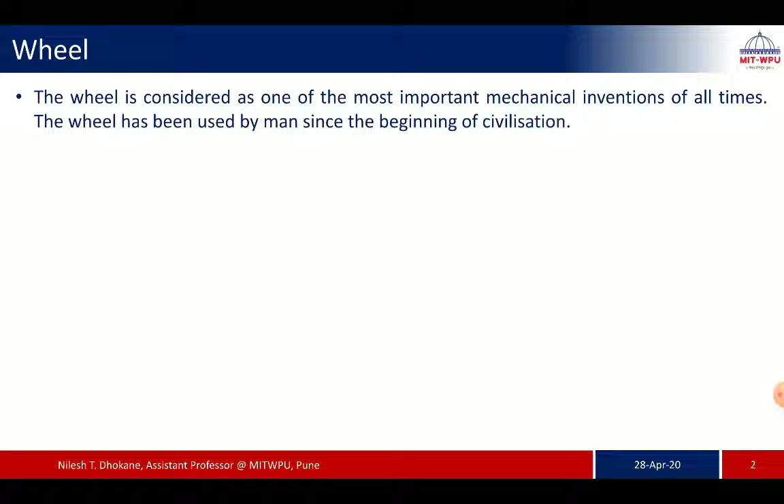The most important mechanical invention of all time is the wheel. The wheel has been used by man since the beginning of civilization. Most primitive technologies since the invention of the wheel have been based on its principles. The invention of the wheel perhaps happened in the late Neolithic age, and it is likely that along with other technological advancements, it gave rise to the early Bronze Age.

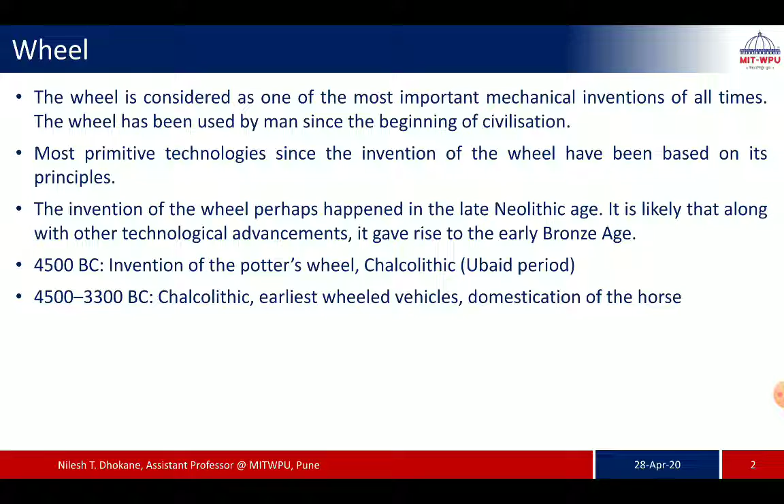So here we will see, in 4500 BC there is the invention of the potter's wheel, and then how it got evolved from 4500 BC to 3300 BC to the Chalcolithic era, earliest wheeled vehicles, domestication of the horse, then early Bronze Age, Middle Bronze Age, and finally the spoke wheels.

Now we'll not go into more detail about the wheel, but this is an important part of the automobile. That's why I have explained when the invention of the wheel was done and what is the part of this invention in human civilization.

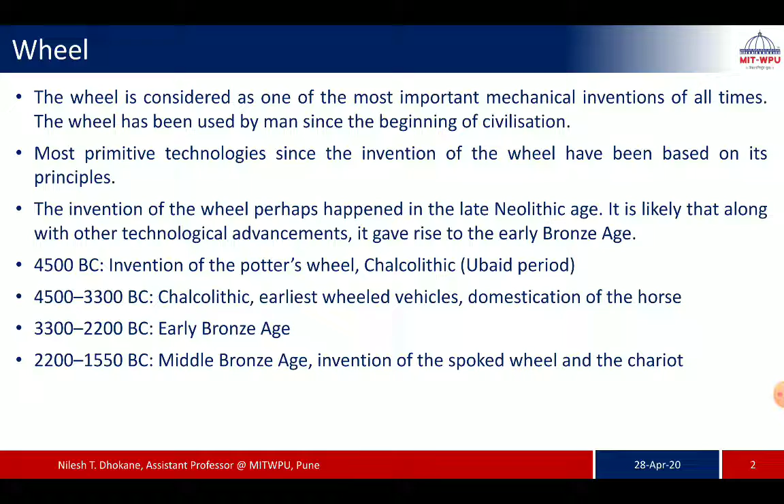Mostly the eras are classified like this, or one more classification I will show you in the next picture. For automobiles, there is the veteran era from 1880s to 1903, then the Edwardian era from 1903 to 1915, then vintage cars from 1919 to 1930, then before World War II there is one segment of automobiles. After World War II there is an impact on the field of automobiles, and finally the modern era, which is still continuing, and we are right now in the modern era.

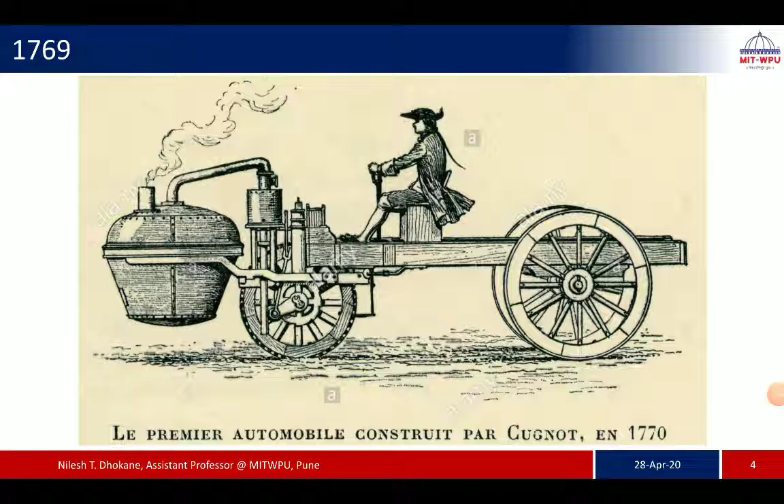Along with this we have some other classifications also, but before this we'll see this first automobile, which was invented in 1769 by Nicolas-Joseph Cugnot, and this is how it looked like. So we'll see about this.

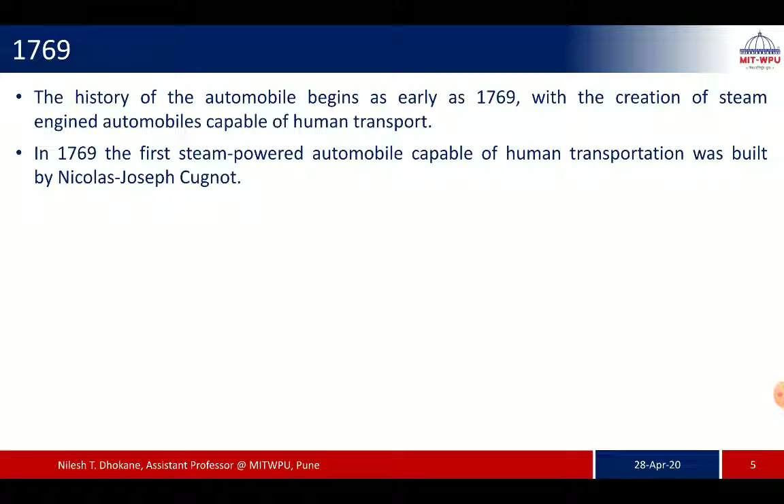The history of the automobile begins as early as 1769 with the creation of a steam engine automobile capable of human transport. In 1769, the first steam powered automobile capable of human transportation was built by Nicolas-Joseph Cugnot.

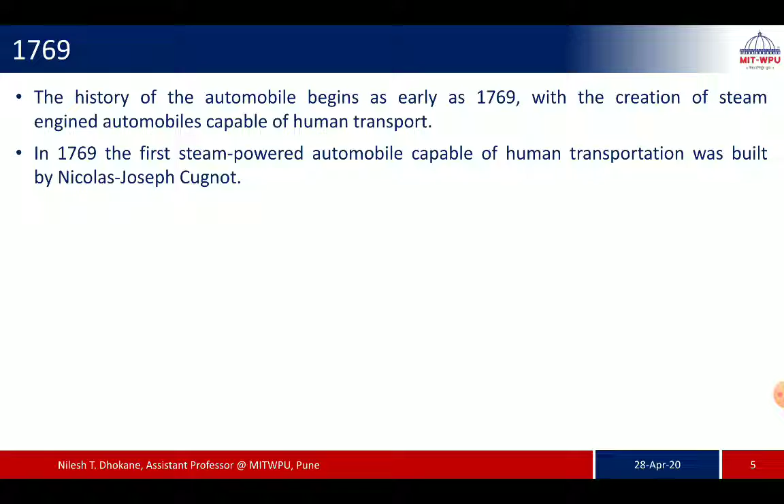After this, we can classify seven eras in chronological order. The first one is the invention era. After Cugnot, the invention era begins, in which there is the invention of the Benz car in 1885. The next is the innovation era after 1896, in which the automobile changed radically from those in previous years.

From 1908, there is a manufacturing era, and after this, around 1920, there is a capsule era where closed cars are manufactured. Before this, the cars were open. We'll see one by one all these eras and what are the different automobile models in all these different eras.

Classic era from 1930 to 1940, before World War II. Then after World War II, there is the integration era, and finally the modern era in which we are living, which starts around 1965 or 68, we can say. And we'll see what different car or automobile models we can see in the modern era nowadays.

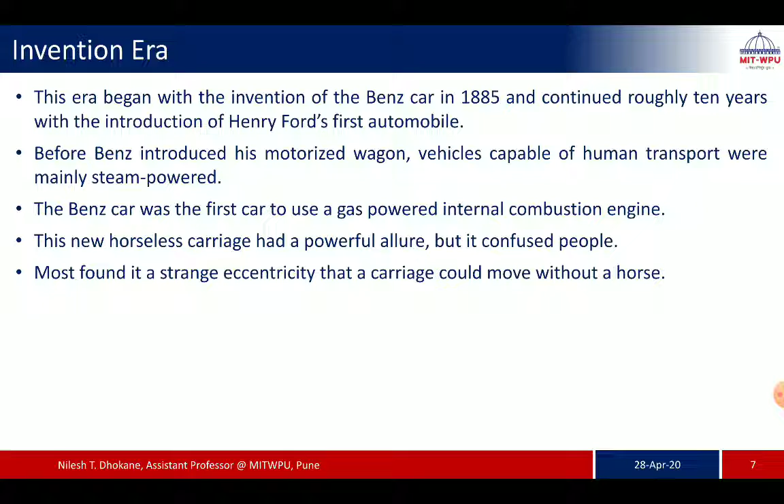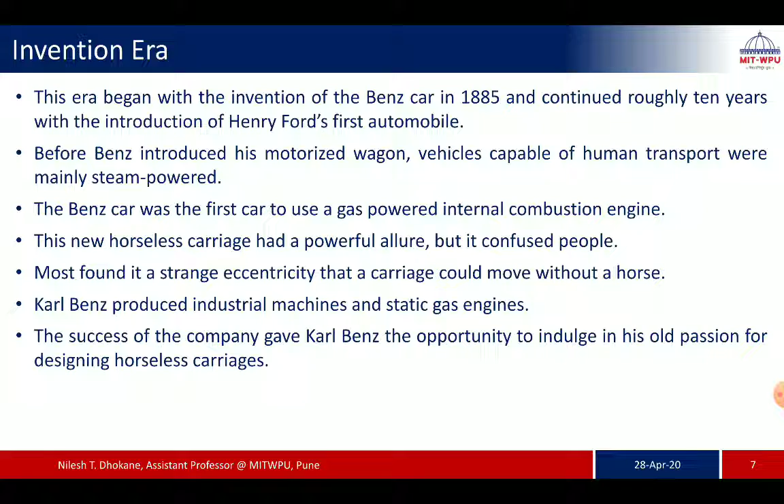Karl Benz produced industrial machines and static gas engines. The success of the company gave Karl Benz the opportunity to indulge in his old passion for designing horseless carriages.

In the invention era, Benz wanted to create an automobile that would run entirely on its own power. This would not simply be another motorized horse carriage using the same technology as his beloved bicycle. He introduced the Benz Patent Motor Wagon in 1885.

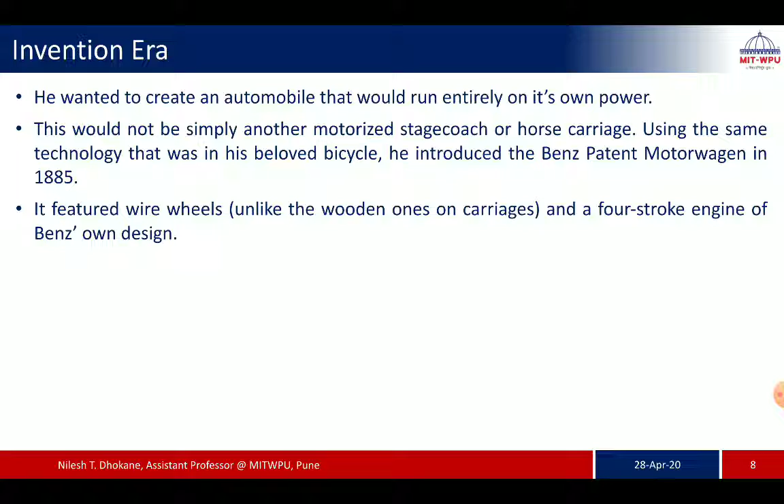It featured wire wheels, unlike the wooden ones on carriages, and a four-stroke engine of Benz's own design. It incorporated an advanced coil ignition and evaporative cooling system rather than a radiator. Power was transmitted by means of two roller chains to the rear axle.

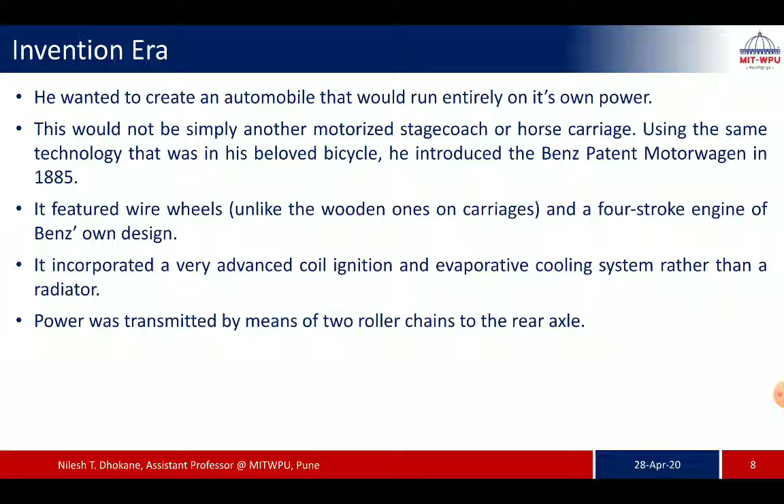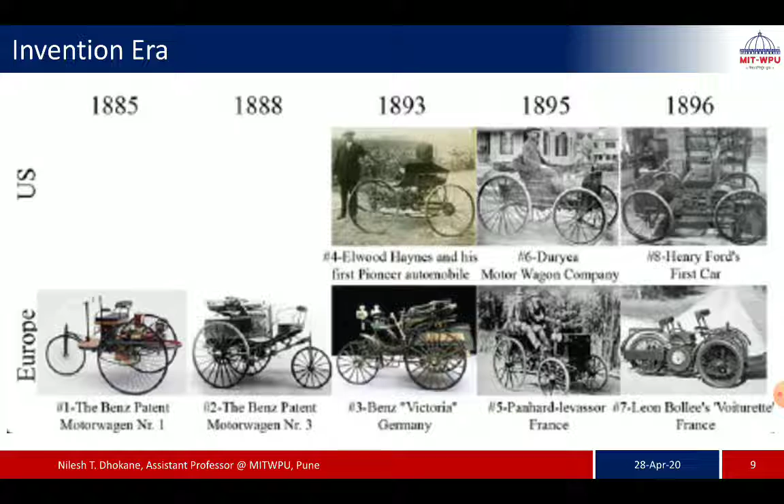Here you can see how the invention era has different car models starting from 1885. The Benz was the first one in 1885. Then some other models followed: 1888, 1893, 1895, and 1896. These were the automobile models of the invention era.

After the invention era came the innovation era, after 1896, where automobiles changed radically from previous years. Throughout the innovation era, widespread car use was still uncommon, and the automobile was seen more as a novelty than a genuinely useful device. The horse and carriage remained the reliable method of transportation, but automobiles sparked people's imaginations.

Automobile designers knew that carriages, which had a relationship to the horse, were not appropriate for their new automobiles. The new cars reflected other changes in society. New industrialists were quickly replacing old familiar ways with a fast-paced lifestyle. As the automobile evolved in the innovation era, it epitomized speed and freedom.

Henry Ford was the first to bring his innovative designs to the new world in the innovation era. Ford's automobiles were different from other cars of that day. His new mass production methods and quality materials set his cars apart, though the price of Ford's car was lower than other vehicles.

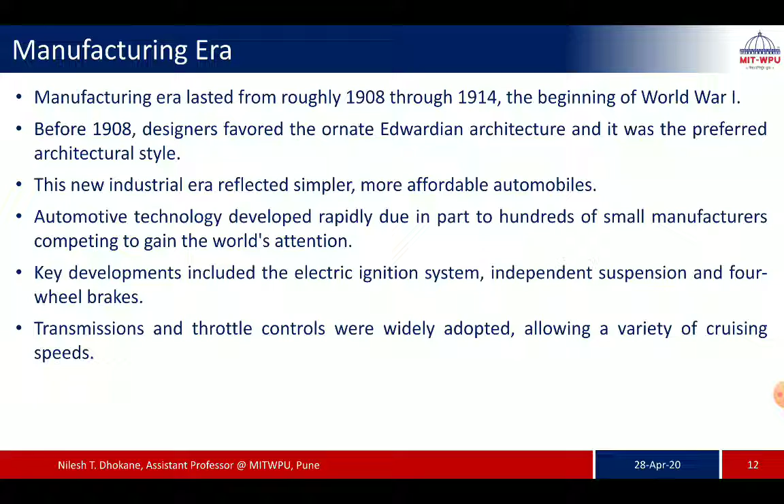Automotive technology developed rapidly, in part due to hundreds of small manufacturers competing to gain the world's attention. Key developments included the electric ignition system, independent suspension, and four-wheel brakes. In the manufacturing era, transmissions and throttle controls were widely adopted, allowing a variety of cruising speeds.

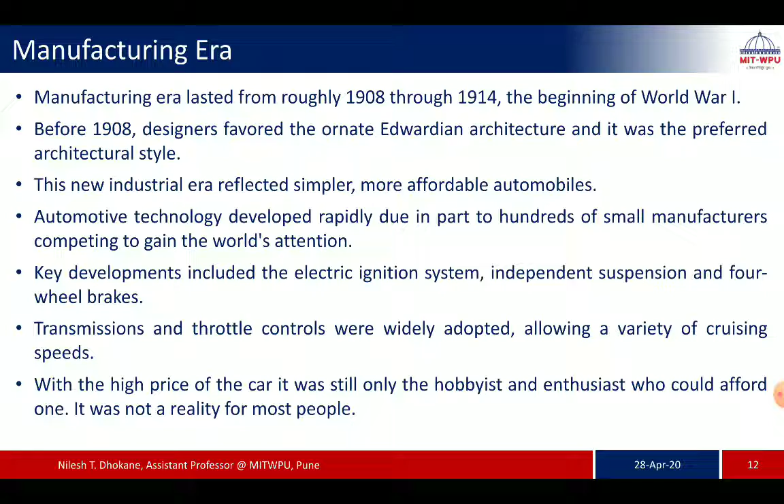With the high price of the car, it was still only hobbyists and enthusiasts who could afford one. It was not a reality for most people.

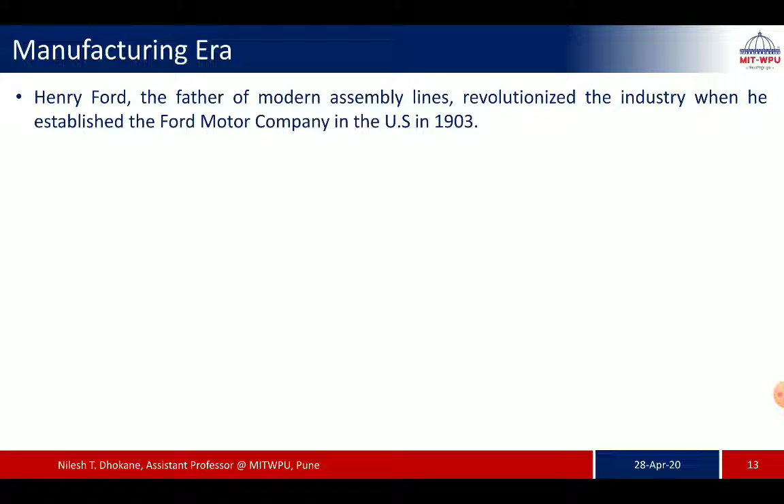Henry Ford, the father of modern assembly lines, revolutionized the industry when he established the Ford Motor Company in the US in 1903.

Ford had a global vision with consumerism as the key to peace. As one of the first adopters of mass production techniques, he introduced the automobile to the ordinary man. He is credited with using the assembly line to make large numbers of inexpensive automobiles, coupled with high wages for his workers.

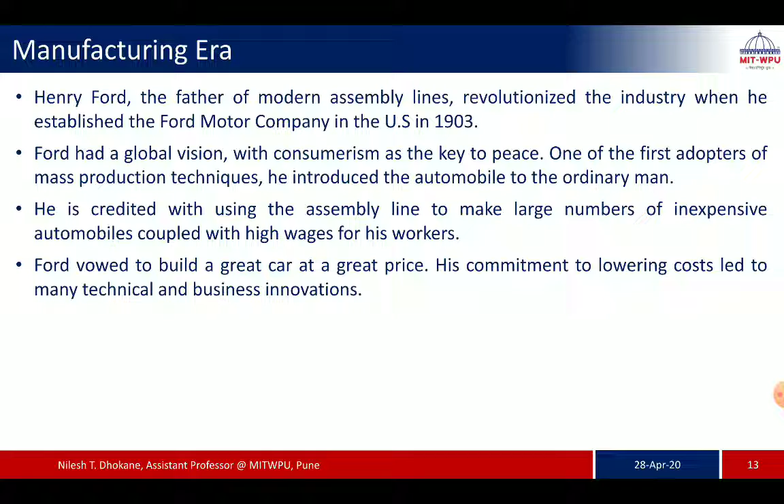Ford vowed to build a great car at a great price. His commitment to lowering cost led to many technical and business innovations. Ford introduced the Model T in October 1908 at the affordable price of $850.

The year 1908 was significant, marking the point when the majority of automobile sales shifted from hobbyists and enthusiasts to the average user.

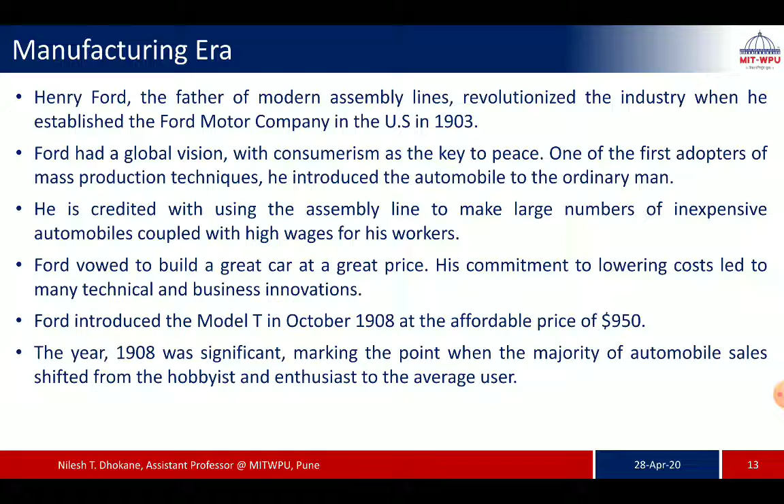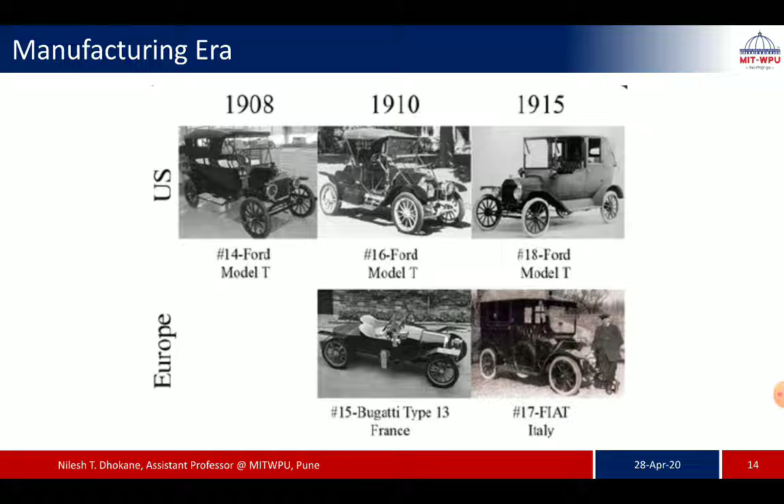The next one is the capsule era, from around 1920 to 1930, where designers closed the body of the car. When designing a car interior, the value of semantic meaning can be manipulated by opening or closing the space.

Simply changing the way the space is divided can change the emotional expression of the space for the consumer. The new closed body, accentuated by curved glass and privacy, had intrinsic value for the consumer.

After the capsule era, there is a classic era. The classic era began with the depression in 1930 and ended around 1940, shortly before World War II. The cars of this period were less rectangular and industrial. The new automobiles were sleek and beautiful.

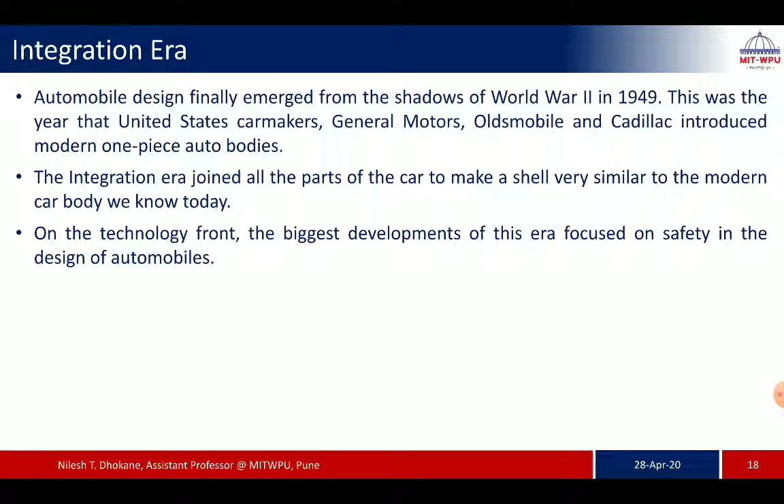And final is the modern era. The modern era is still continuing, beginning around 1968 and continuing to the present day. Designers today take into account not only the functionality but also consumers' emotional reactions to their automobiles. Designers are well aware of how to create the feeling of speed, but the feeling of speed is not the only expression the consumer is looking for.

The semantic frame of the car is changing once again. Designers have recognized the potential to appeal to the consumer's personal desires and taste using all areas of an automobile. Automobile designers no longer only borrow semantic meaning from planes and missiles. Today they are looking at more organic, bionic forms to mirror.

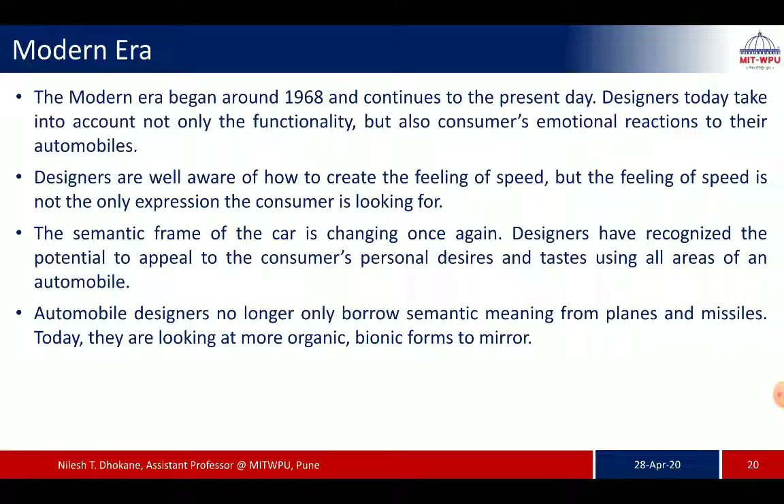Car designers study the biomimicry of animals and insects and indirectly insert the animal's semantic frame into the look and feel of the car. It's not necessary to use the animal's literal form; the meaning is implied.